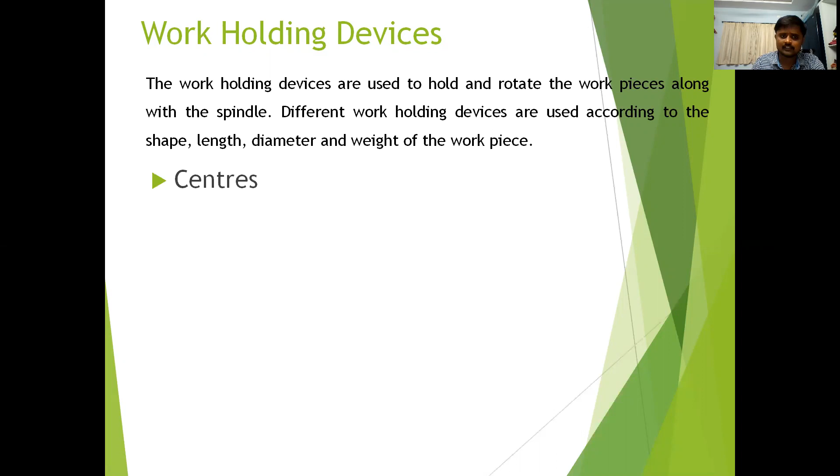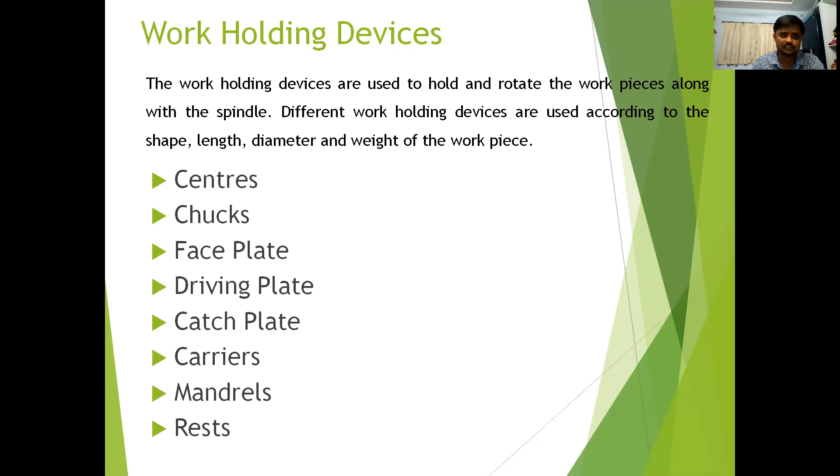We'll see some of the work holding devices: lathe centers or centers, chucks, faceplate, driving plate, catch plate, carrier, mandrels, and rests. These are some work holding devices which are generally used in the lathe machine to hold the workpieces and to rotate the workpieces.

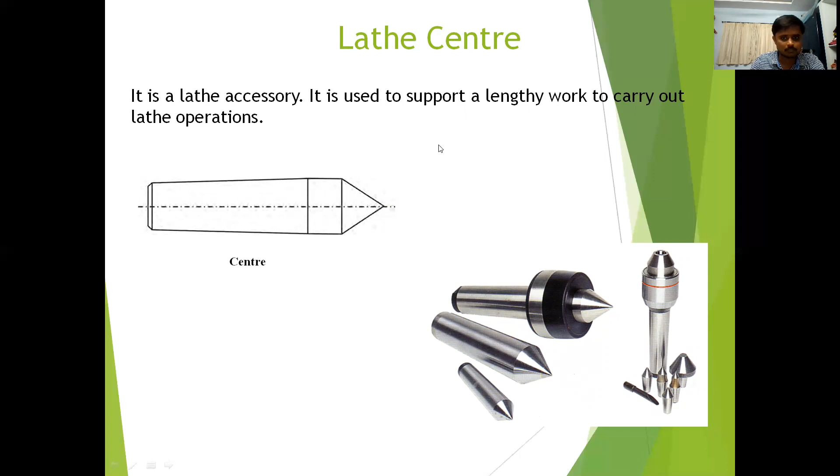First one, lathe center. It is a lathe accessory used to support a lengthy work to carry out the lathe operation. This is the lathe center, used to support the lengthy workpieces. To hold the lengthy workpiece, we hold it in between the lathe centers, and we can do the operation on the given workpiece. So like this, you can hold the lengthy workpiece in between the two centers. These are the two lathe centers.

So this is the live center, and this one is the live center, and this one is the dead center. This center is attached to the spindle, main spindle. So the motion is transferred from main spindle to the lathe center, and lathe center to the workpiece. So this is involving in the rotation, that's why it is called a live center.

There is no movement in the dead center. The dead center is inserted into the tailstock, and there is no rotary movement in the tailstock, that's why it is called a dead center. So like this, you can hold the workpiece in between the two centers - this is the live center, and this one is the dead center. So this is about the lathe centers.

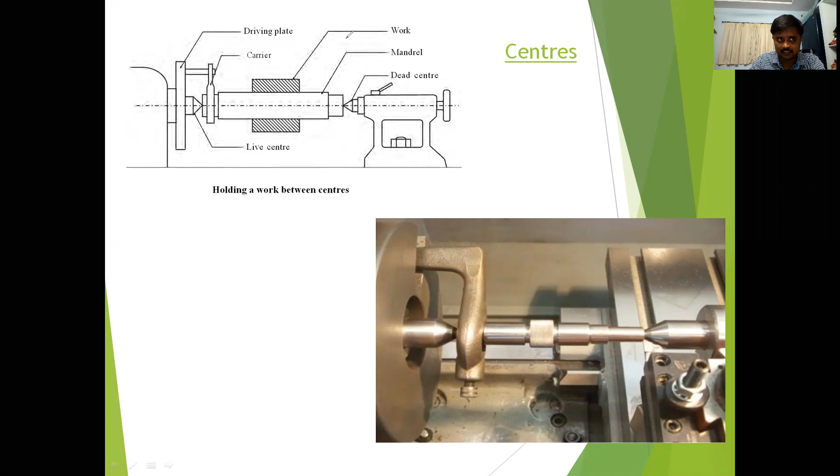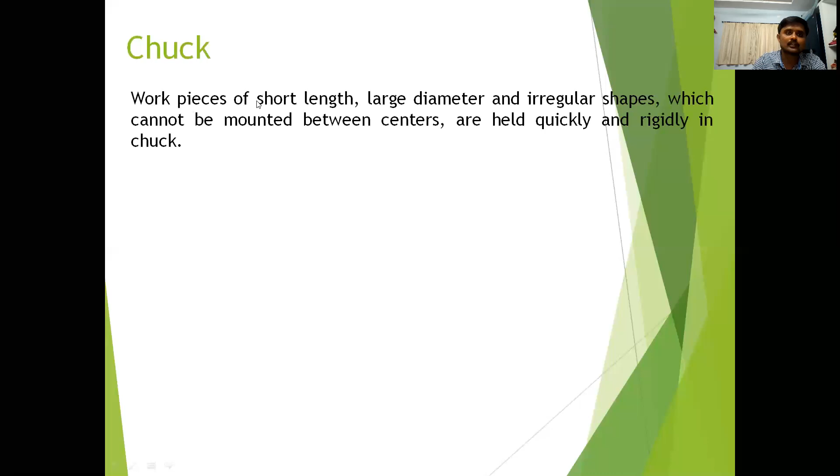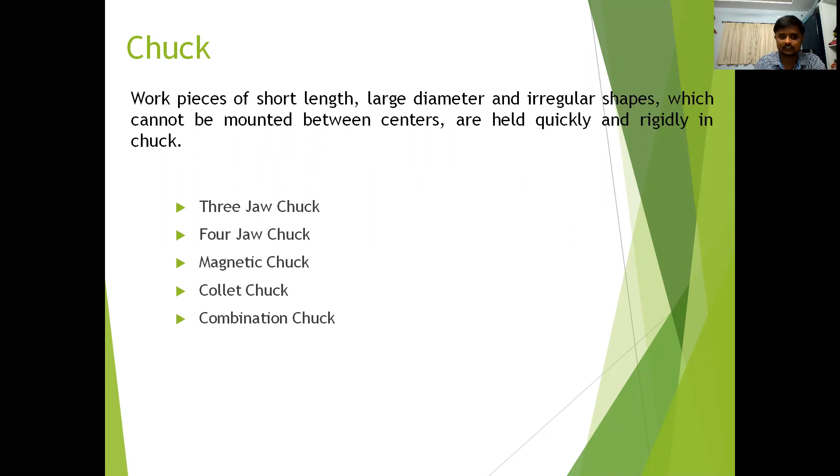In that case, we are going to replace the lathe center with the chuck. There are different types of chucks: 3-jaw chuck, 4-jaw chuck, magnetic chuck, collet chuck, and combination chuck. These are the classification of the chucks.

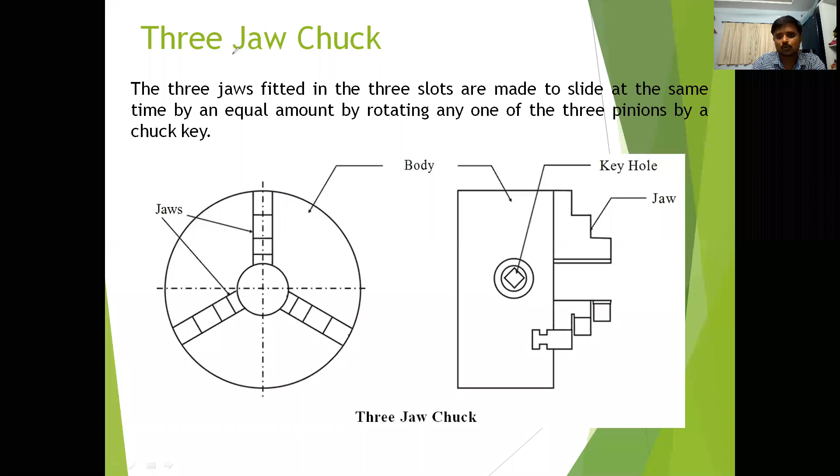That's why it is called a self-centering chuck. By operating only one key, the three jaws will be moved either towards the center or away from the center. That's why it is called a self-centering chuck. Generally, this type of chuck is used to hold cylindrical objects.

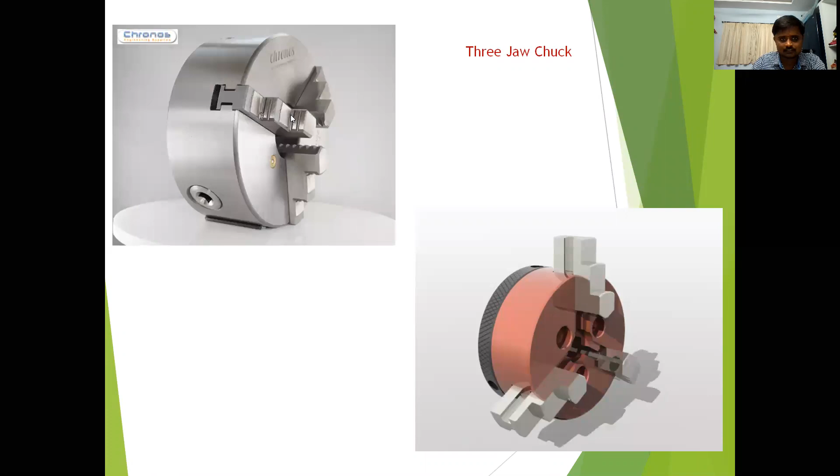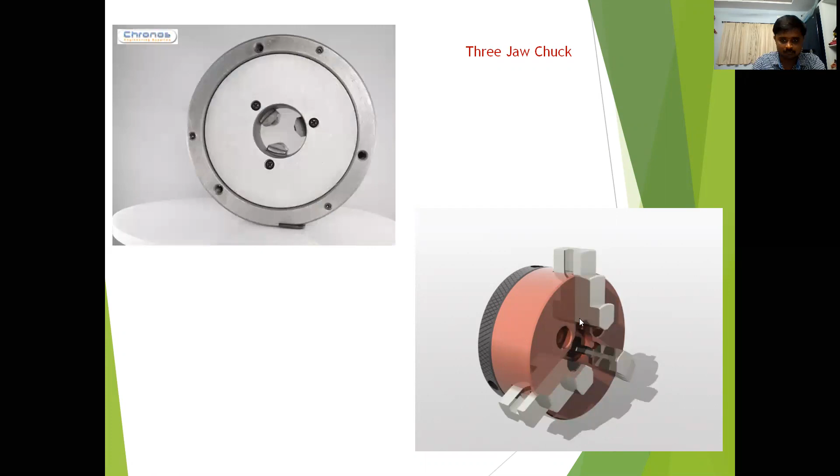This is the three jaw chuck. These are the three jaws. If you want to operate these three jaws, you can use any one of the keys to move these jaws towards the center or away from the center at a time. So this is about the three jaw chuck.

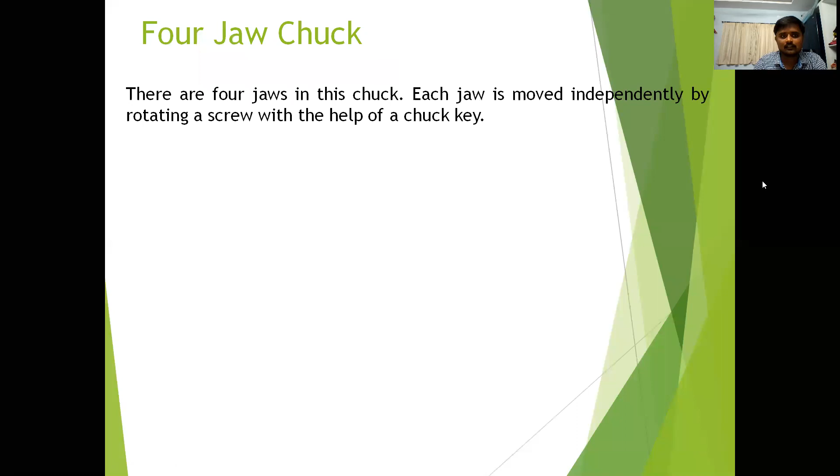Now coming to the four jaw chuck, it has four jaws, as the name indicates. Each jaw is moved independently by rotating a screw with the help of a chuck key. In case of the three jaw chuck, all the jaws move at a time, but here each jaw is moved independently. This is the first jaw, second, third, and fourth jaw. Each jaw has one key to operate it, just like the three jaw chuck.

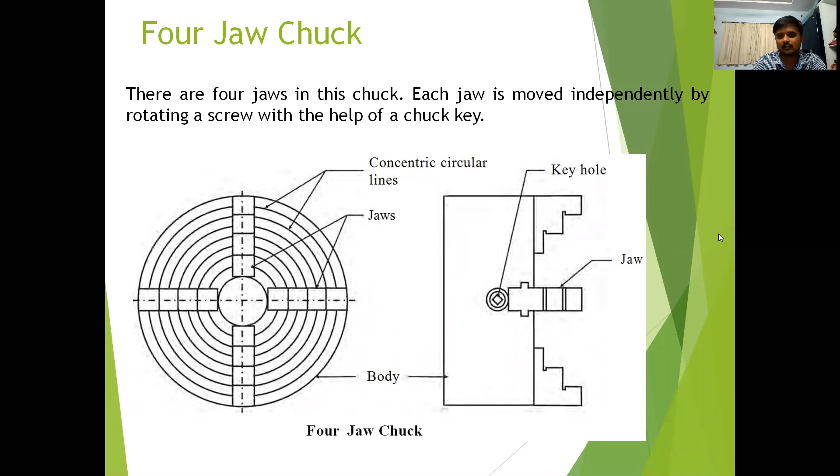If you want to move this jaw, you operate this key, either moving the jaw towards the center or away from the center. While it is moving, there is no movement in the other jaws, meaning each jaw moves independently. That's why it is called an independent chuck. This type of chuck is generally used to hold square or rectangular shapes, other than cylindrical shapes.

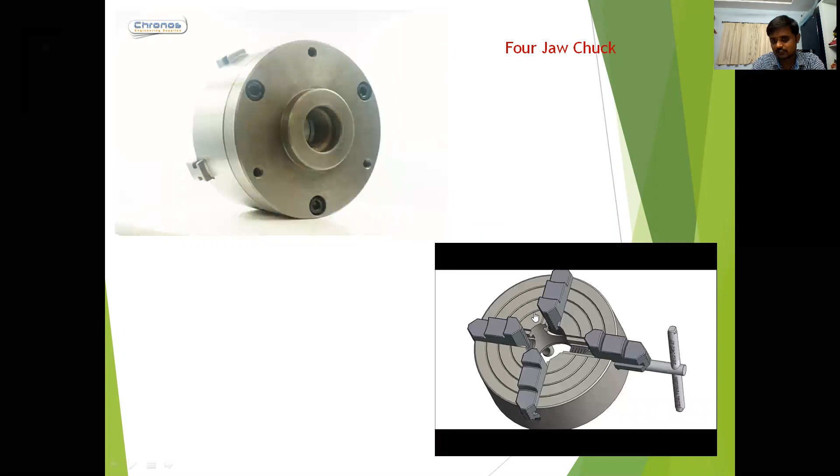These are the four jaws. If you observe, while operating this key, only this jaw is moving; the remaining three jaws stay constant, with no movement. Either you can move the jaws towards the center or away from the center by operating the respective keys. That's why it is called an independent chuck.

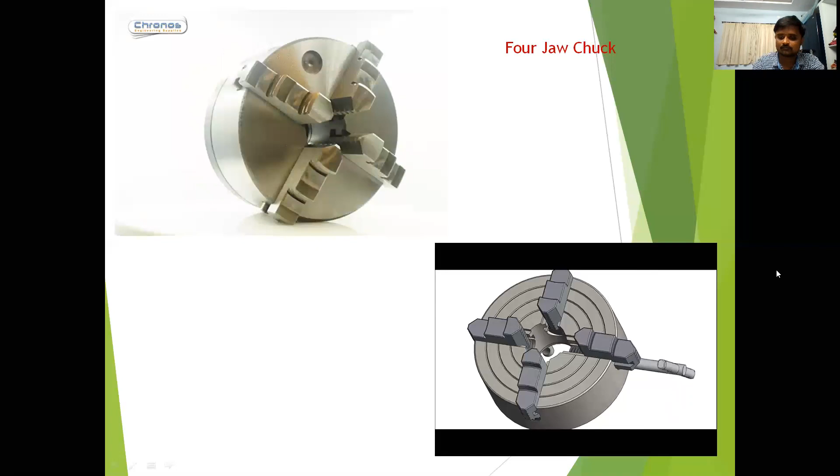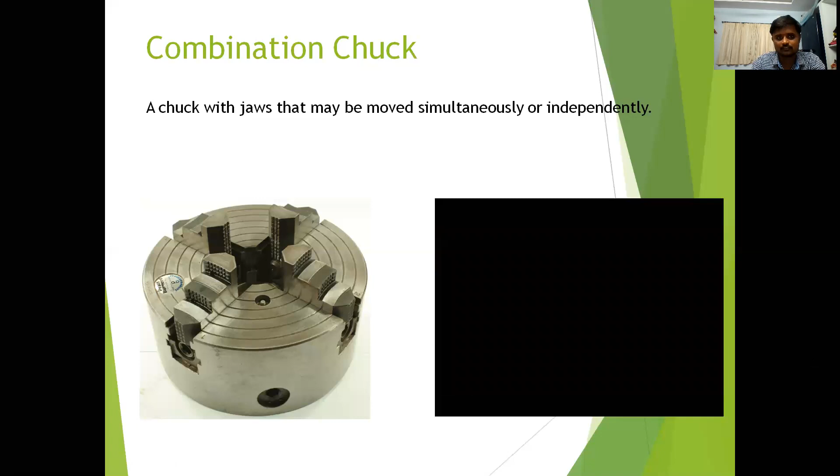It is a self-centering chuck, and on the same chuck we can also move the jaws independently, just like the four jaw chuck. If you operate this key, only this jaw moves; the remaining three jaws have no movement. So we can use this combination chuck as a self-centering chuck or as an independent chuck. That's why it is called a combination chuck.

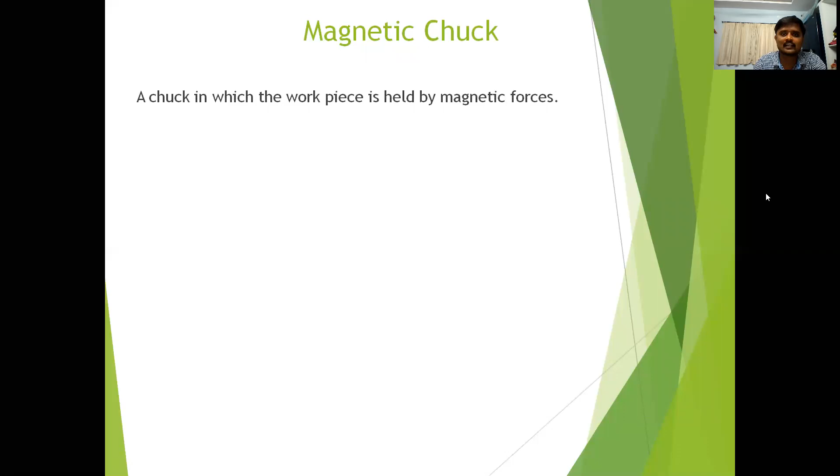Next is a magnetic chuck, named because it uses magnetic power to hold the workpieces. These are the magnets, and this is the magnetic chuck. By using this key, you can switch the magnetic power on or off.

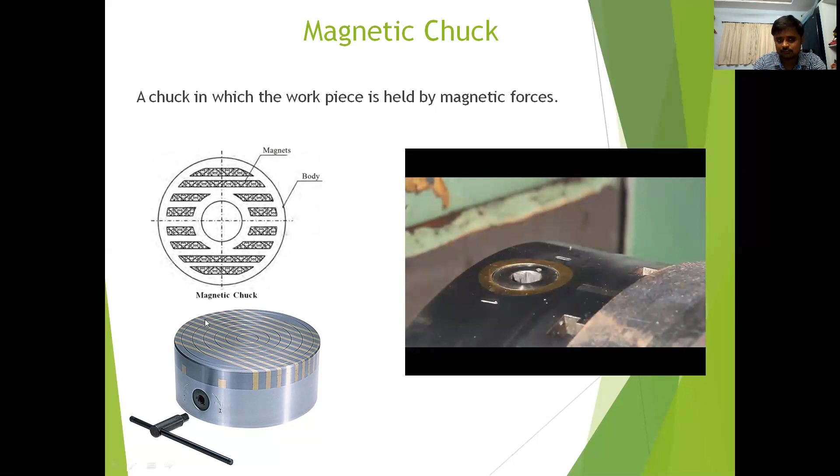Now you can see how we are going to hold the workpiece. This is the workpiece and this is the magnetic chuck. We move the tailstock for supporting purposes, and when we switch on the no-deformation clamp, we are switching on the magnetic power. Automatically, once the magnetic power is switched on, the chuck fixes the workpiece, and you can perform the operation.

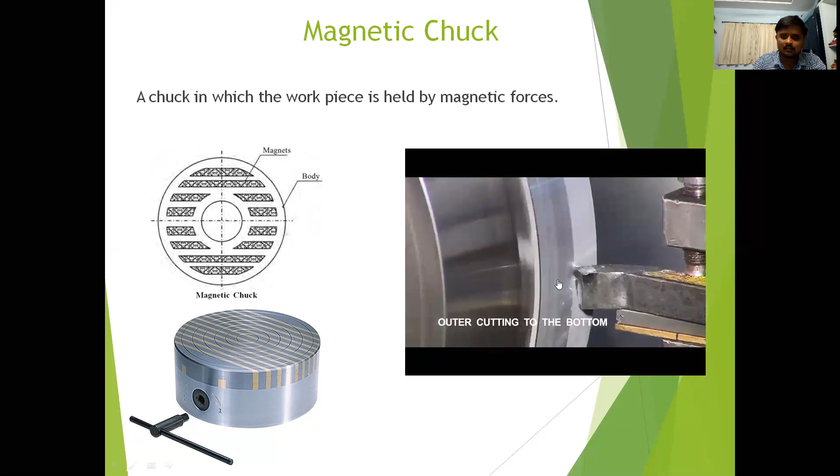However, the limitation of this magnetic chuck is that it is used only for smaller, lower weight objects. It cannot withstand higher weight objects. So this is about the magnetic chuck. Next one is a collet chuck.

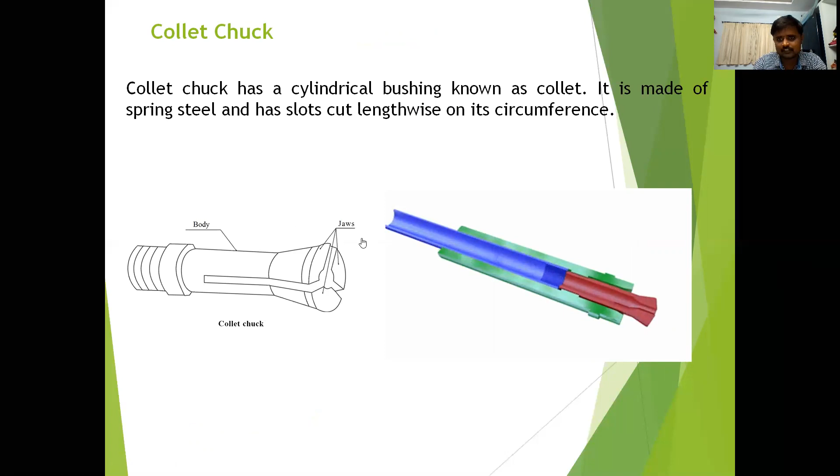Collet chuck has a cylindrical bushing known as a collet. This is the cylindrical bushing. It is made of spring steel and has slots cut lengthwise on its circumference like this.

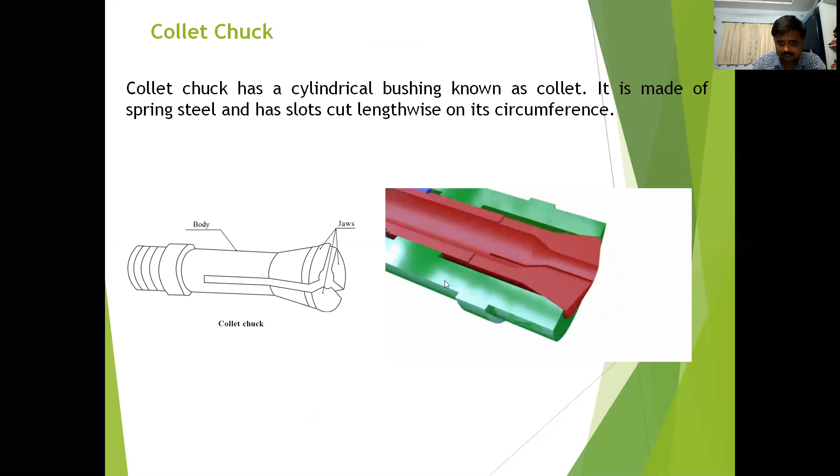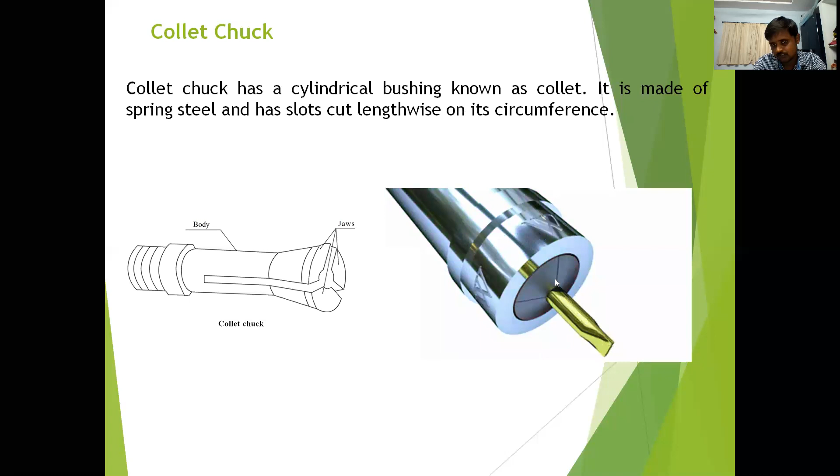Here these are the jaws. We can hold the workpiece here, so you can adjust the jaws. This is a spring type. You can observe here, you can hold the workpiece tightly and rotate the workpiece. If you pull out these bushes, automatically the workpiece will come out from these jaws.

We'll see next, this is the collet chuck, and here we are going to place the workpiece and rotate this sleeve to tighten the jaws. Now see how we are going to hold the workpiece by using the collet. This is the collet chuck.

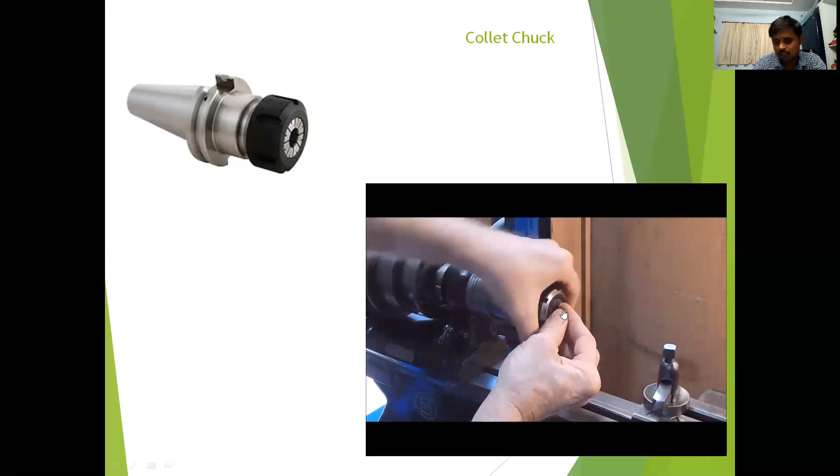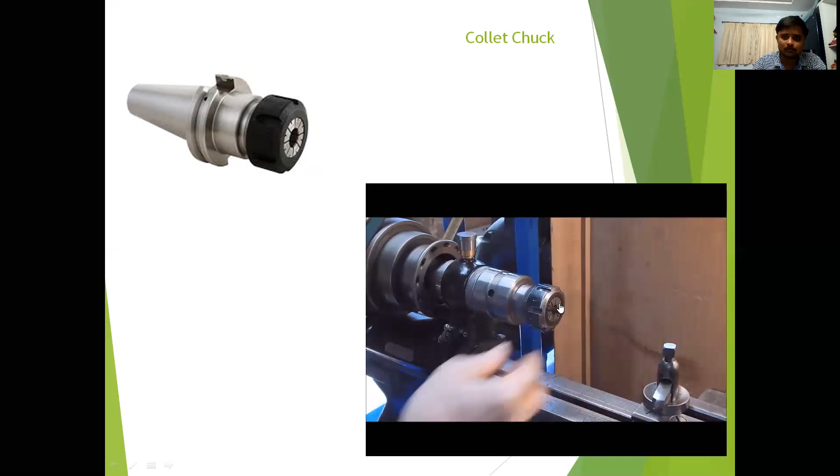This is a small workpiece, because it is not possible to hold smaller workpieces by using the jaws/chuck. So if you want to hold the workpiece very tightly in the work lathe machine, we are going to use the collet. Now you can observe this is a very small workpiece, so it is not possible to hold it using the regular jaws. In that case, we are going to use the collet jaws, which are used to hold very small workpieces.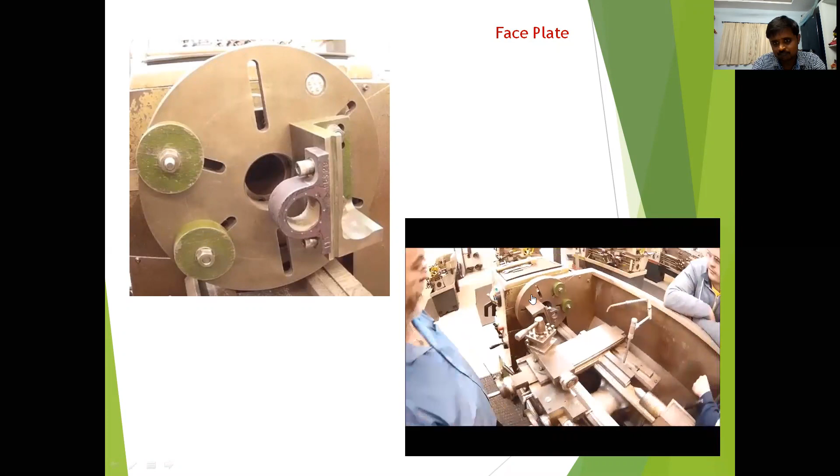Now here, if we fix this object on the faceplate using the angle plate, these are weights used for counterbalance. So this is our piece. Then you can rotate the faceplate - the faceplate is fixed to the main spindle, and you can fix the workpiece on the faceplate. Now you can perform the operation.

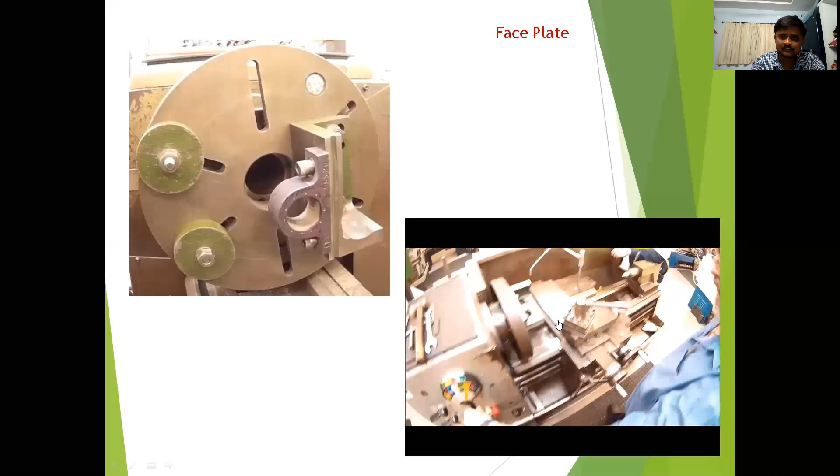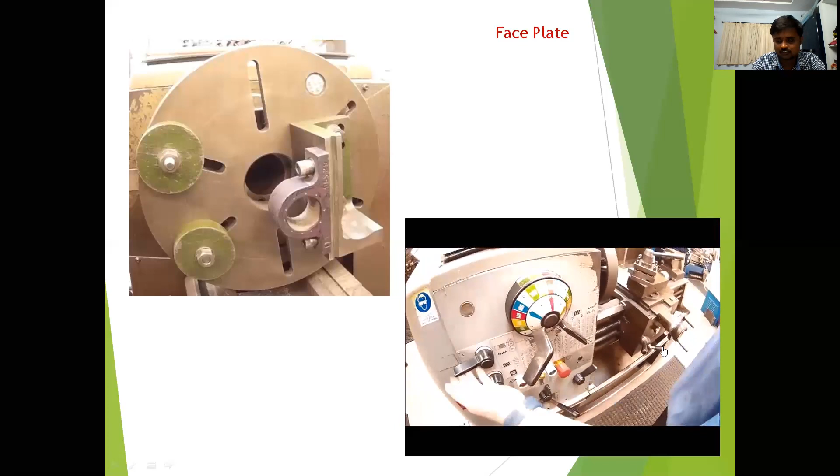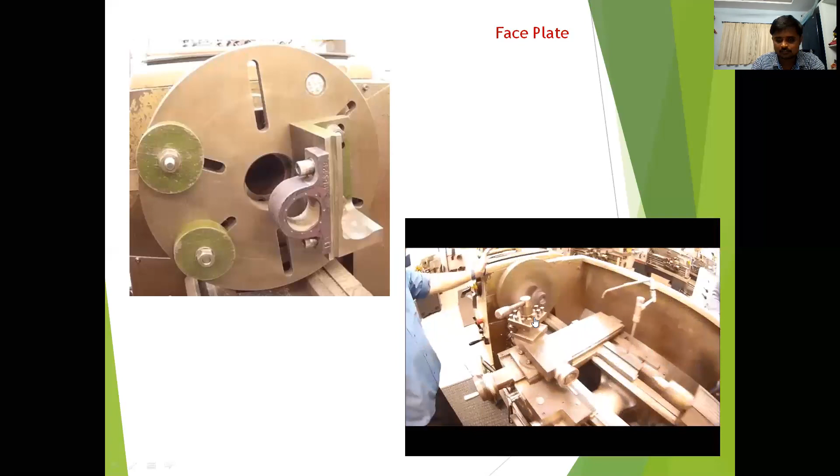So if an object has an irregular shape, it is not possible to hold it using the jaws - in that case, you can use the faceplate. By using the faceplate, you can hold any type of object. Now you can observe this video - the faceplate is rotating and the workpiece is also rotating, so we can do the operation and remove the material. So this is about the faceplate.

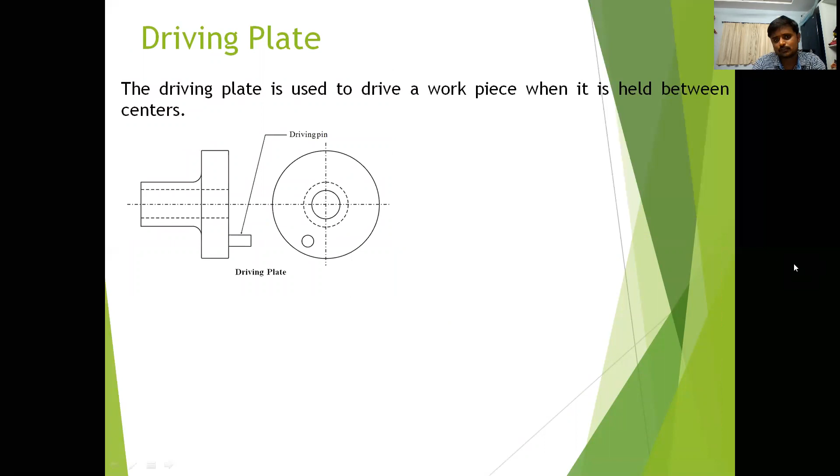Next, driving plate. The driving plate is used to drive a workpiece when it is held between the centers. So this is a driving plate. Generally, centers are used to hold long length workpieces - while holding long workpieces, motion is transferred from the headstock to the head spindle, spindle to live center, and live center to the workpiece. So when the spindle is moving, automatically the workpiece rotates. To hold the workpiece properly and perfectly without slipping, we use the driving plate, which is used along with the lathe dogs. Next we will see what is the lathe dog.

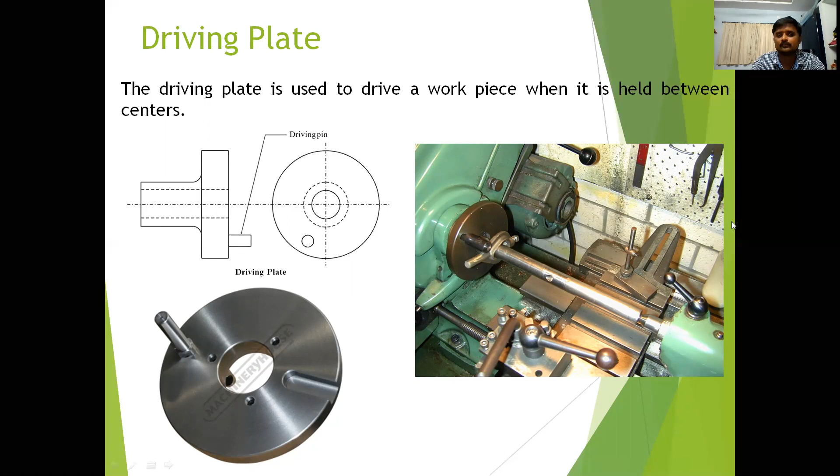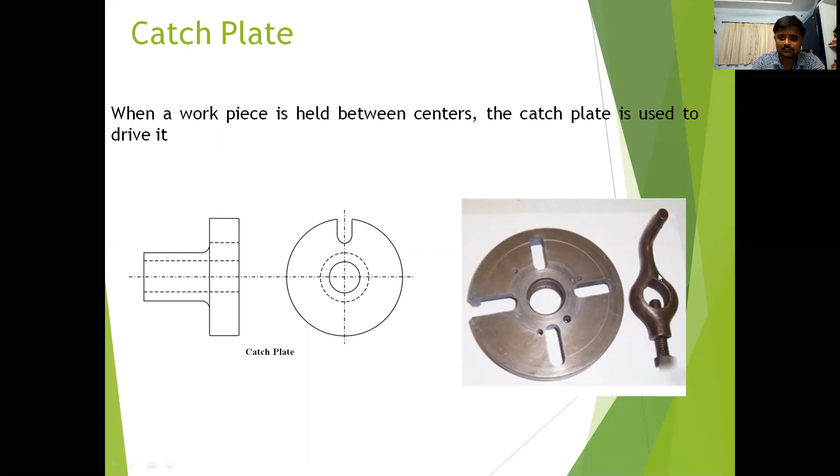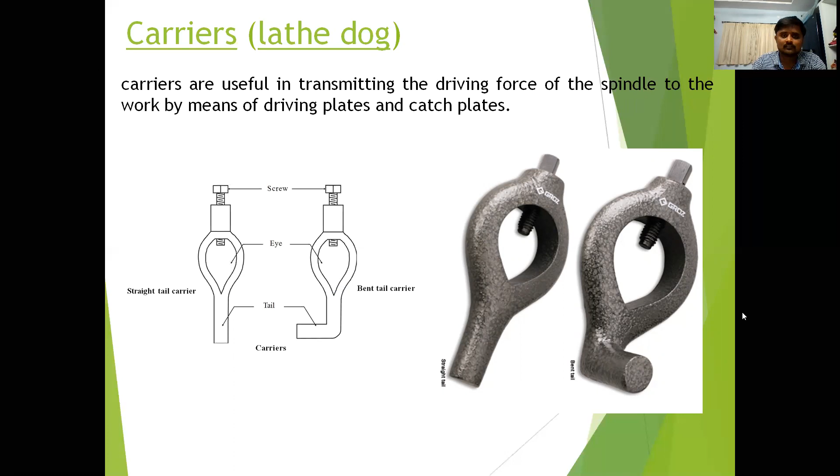The name carrier comes from how power transmission takes place in the lathe machine. Generally the power transfers from the motor to the gear shaft, from there to the headstock to the spindle, spindle to the chuck, and chuck to the workpiece.

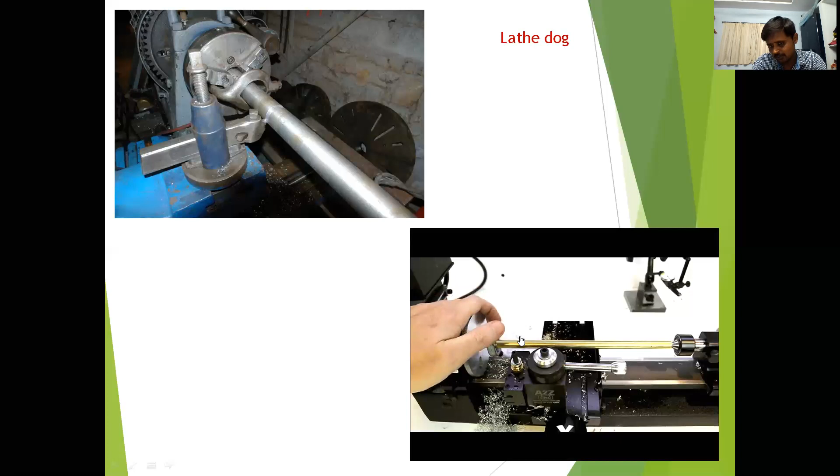When holding the workpiece between the centers, this is the driving plate. When the spindle rotates, the driving plate also rotates. If the driving plate rotates, the lathe center will rotate, and when the lathe center rotates, the workpiece is automatically rotated, since the workpiece is held between the two lathe centers.

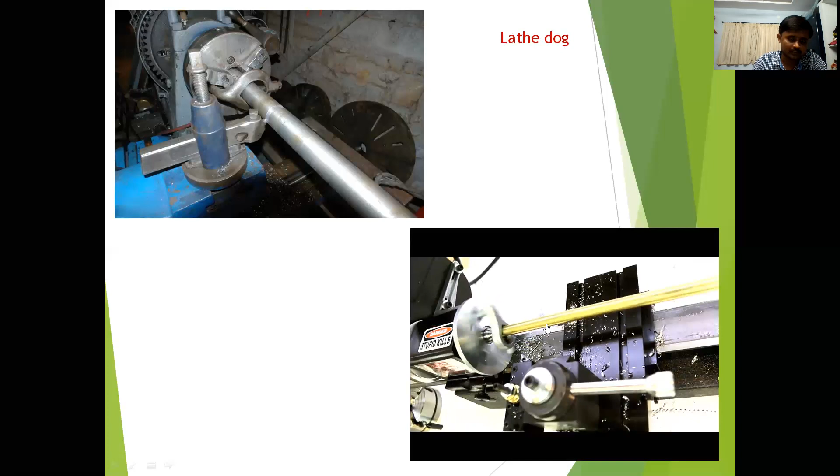To transfer the motion from the lathe center to the workpiece without losing any energy, we use the lathe dog, which is why it's called a carrier. If you are not using this carrier, and the lathe center moves at 500 rpm, the workpiece may not rotate at the same 500 rpm - it may skip. To avoid that skipping, to avoid the loss of motion from the lathe center to the workpiece, we use the lathe dog. That's why it's called a carrier - it carries the motion from the headstock, spindle, or lathe center to the workpiece.

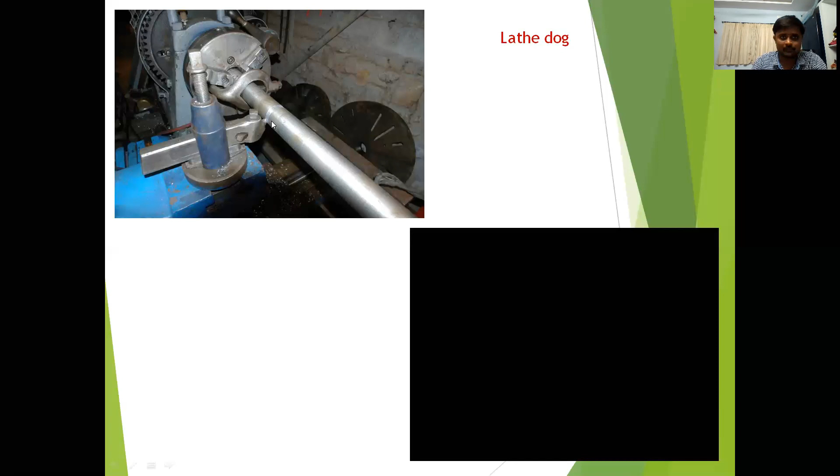Next one is the mandrels. Lathe mandrels are devices used to hold the job for machining on lathes. They are mainly used for machining outside diameters with reference to bores which have been duly finished by either reaming or boring on the lathe.

Generally chucks, lathe centers, catch plates and driving plates are used to hold solid objects. But if you want to work on the external surface of a hollow object, for example a hollow shaft, how do we hold that? Or if I take a gear and want to do some operation on its external surface, how do we hold that gear? That means we need a special device.

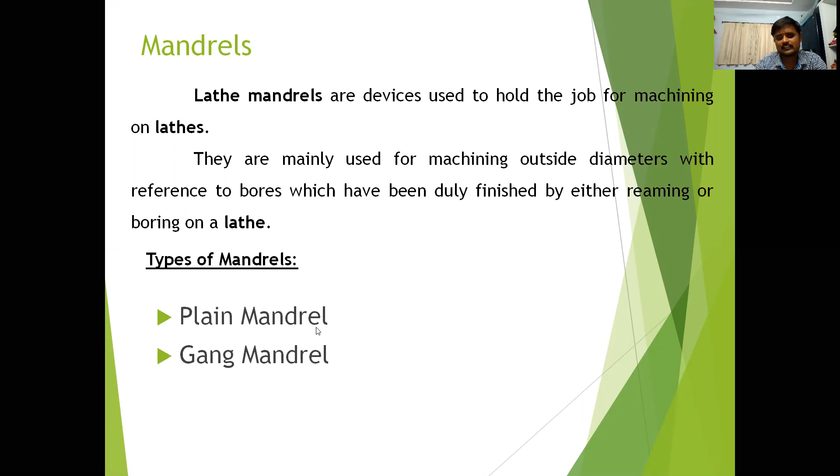Mandrels are mainly used for machining outside diameters with reference to the bores. There are different types of mandrels: plain mandrel, gang mandrel, screwed mandrel. First one, the plain mandrel. The body of the plain mandrel is slightly tapered to provide proper gripping of the workpiece.

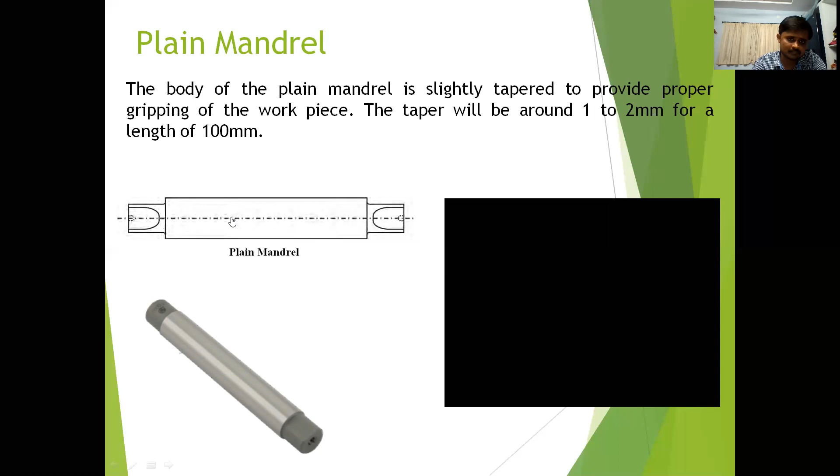It is generally tapered. On the external surface of the plain mandrel, we place our workpiece, which has some hole in it, since we want to do an operation on its external surface. This type of workpiece is not possible to hold using chucks or centers, so we place it on the plain mandrel and insert the mandrel inside the workpiece to get a tight fit.

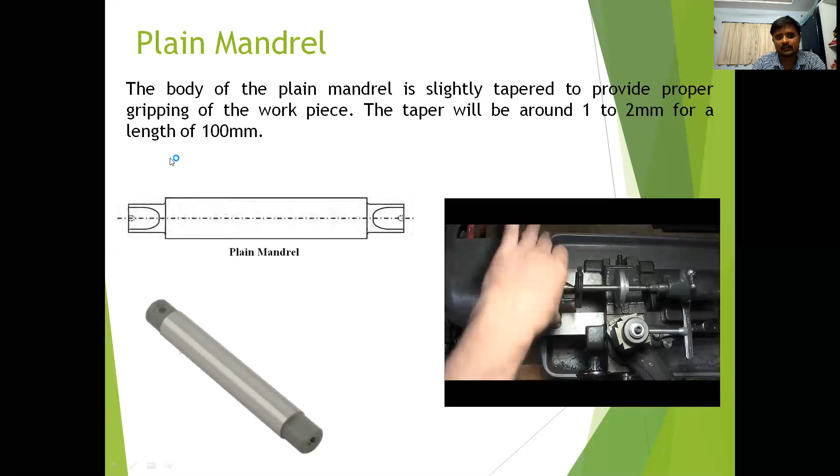Generally the plain mandrel has a taper of around 1 to 2 mm for a length of 100 mm - a tapered surface. We insert the workpiece, and because it is tapered, as it moves from one end to the other end of the plain mandrel, we get the tight fit.

This is the plain mandrel, and this is the workpiece attached to it. If the mandrel rotates, the workpiece automatically rotates. This is how you can hold workpieces that have bores or holes using the plain mandrel.

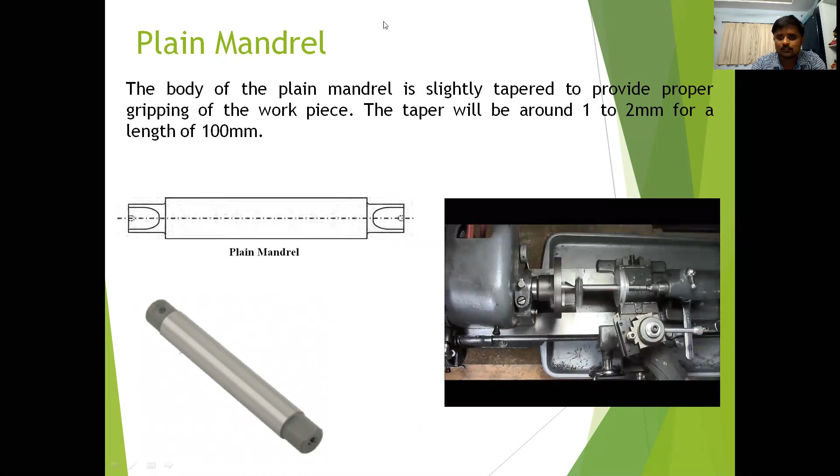Next one is the gang mandrel. It has a fixed collar at one end and a movable collar at the threaded end. Let's observe this mandrel here.

So this is the mandrel, this is the fixed collar, and this is the open end. This is a threaded open end, and this is a nut, and this is a movable collar. Gang mandrel, the name itself, it is a gang.

By using the plain mandrel, we can hold only one workpiece at a time. But here, by using this gang mandrel, we can hold three workpieces. If you observe, this is the first workpiece, this is the second one, and this one is the third one. So you can hold three workpieces at a time.

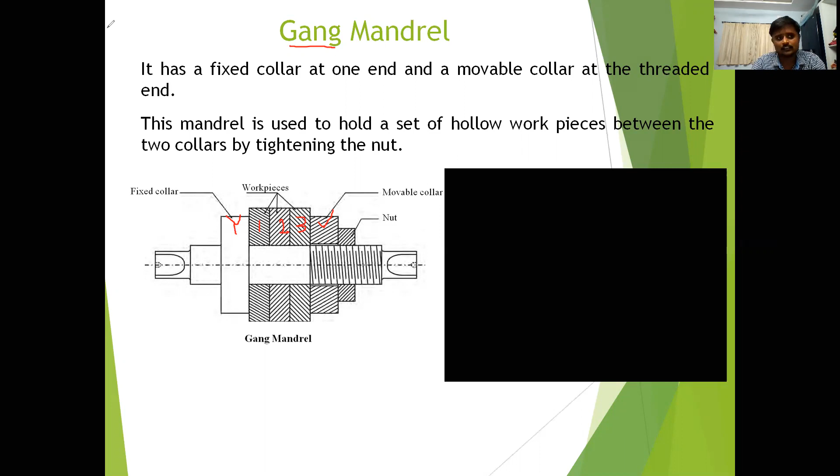To get the tight fit, we insert the three workpieces on the gang mandrel, and we insert one movable collar, and we fix these workpieces in between the fixed collar and movable collar by using the nut to get the tight fit. So like this, you can hold more than one object by using the gang mandrel.

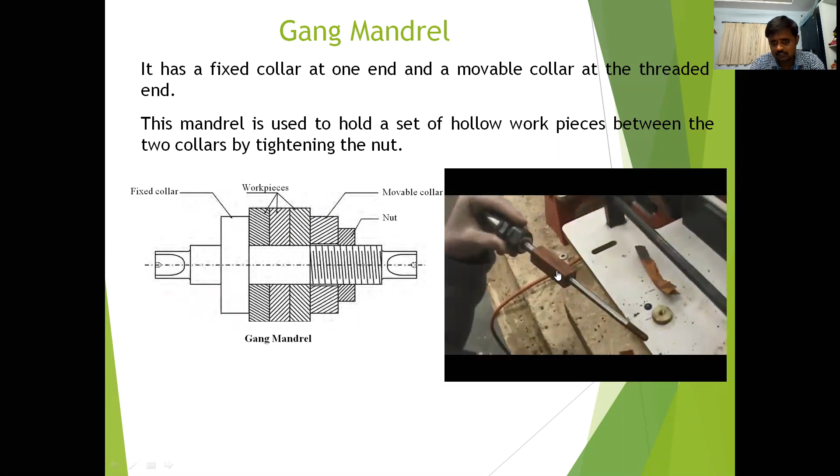Let's see here, this is a gang mandrel, and this is one workpiece, and next we are going to insert another workpiece. So here we place this object, now to make a distance between the two workpieces.

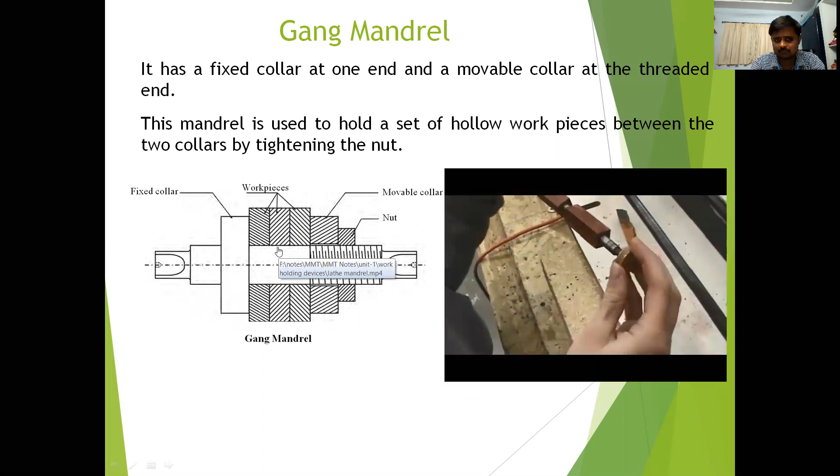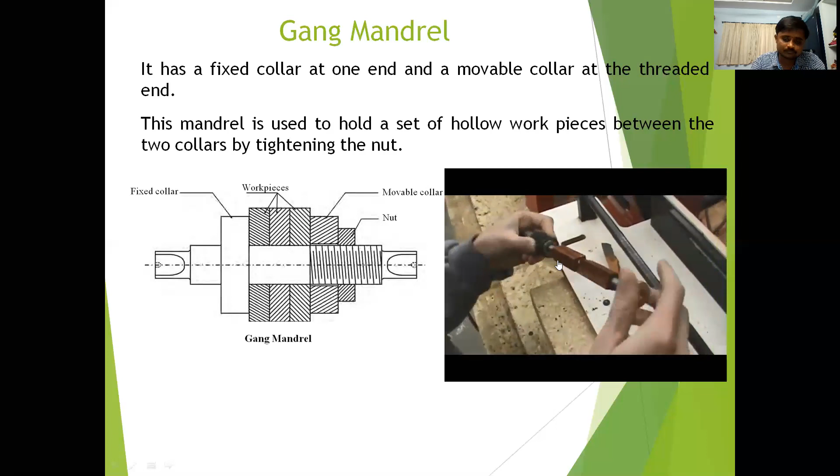Either you can fix the workpieces perfectly, or you can make some difference, you can make some gap between the two workpieces to get the tight fit. We insert a nut to get the tight fit. So like this, you can hold two or more objects by using the gang mandrels.

So next one, the screwed mandrel. Workpieces having internal threads are screwed onto it against the collar for machining.

So if any workpiece has internal threading, let's say for example we take some nut or bolt. You're going to take some bolt or nut. Let's say I'm going to take one example of a nut.

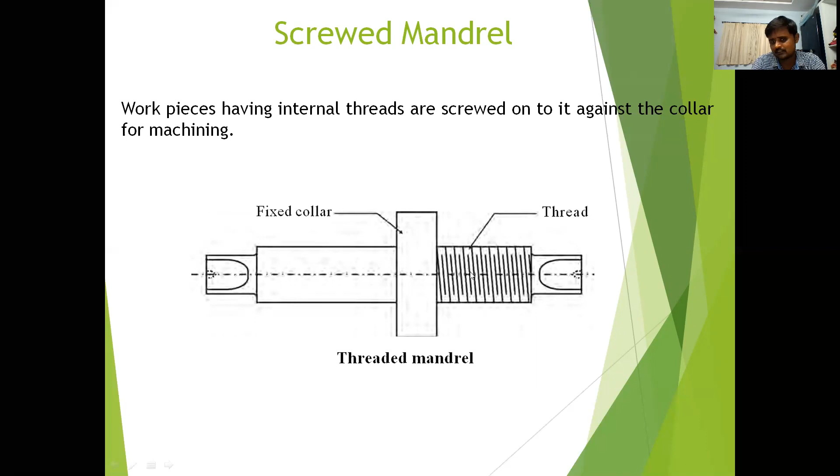If you want to do some operation on the external surface of the nut, since a nut has internal threading, first you have to hold the workpiece. To hold the workpiece, we use the threaded mandrel, which already has some threads, and on this we place the nut.

Coming to rests, a rest is a mechanical device to support a long slender workpiece when it is turned between centers or by a chuck. These are used to support the workpieces.

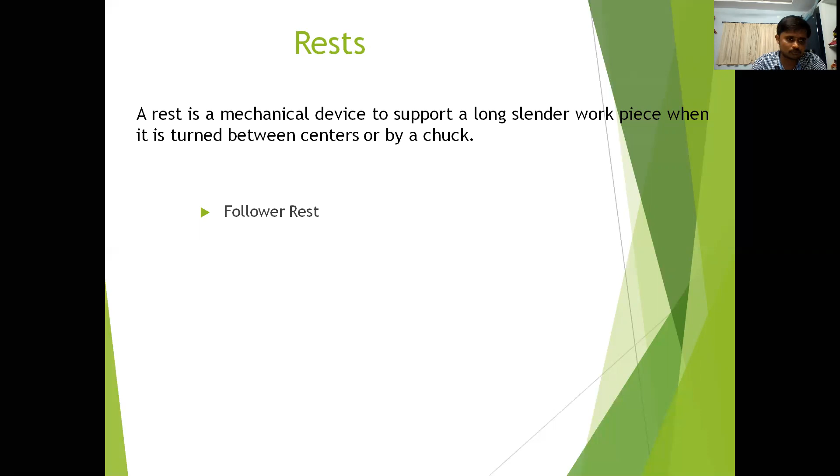There are two types of rest: follower rest and steady rest. The steady rest may be made to slide on the lathe bedways and clamped at any desired position where the workpiece needs support.

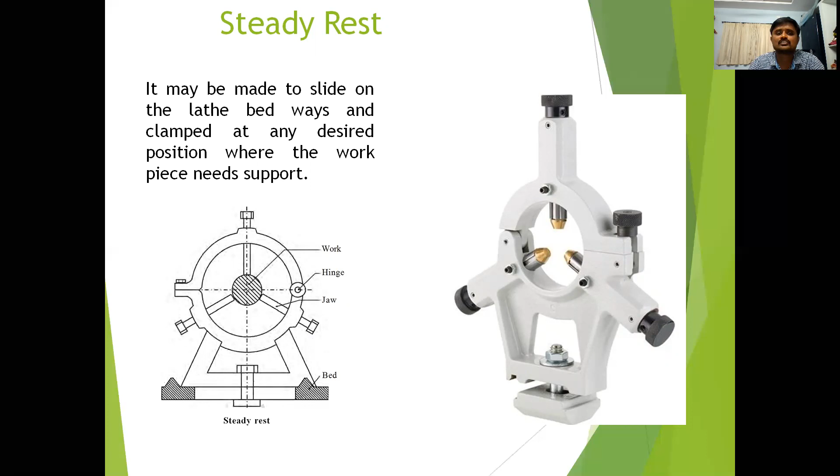So while it is moving automatically at this end, we may observe some vibrations of the workpiece. To avoid those vibrations and to get support to hold the workpiece at the other end, we place the rest. So here we can fix this rest.

Let's see here where the object is fixed in between the rest. So the steady rest means the rest is fixed at a given position. It will not move. You can adjust it anywhere, but once you fix the rest, you can't move the position of the rest.

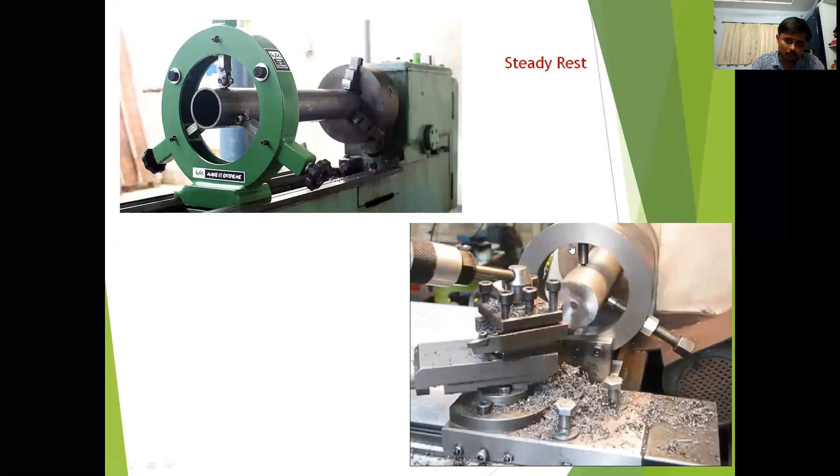So we can hold the workpiece, that's why it is called a supporting purpose, or a supporting device. So like this, you can support the workpiece by using the rest. We can do the operation. So this is for the supporting purpose.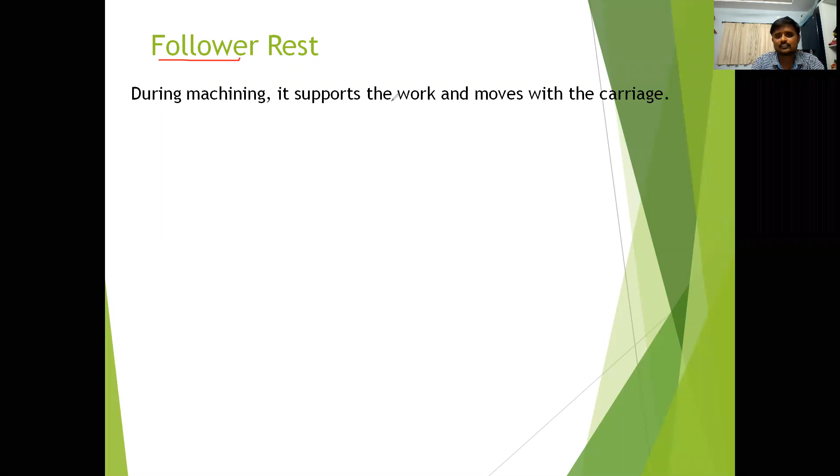Next, the follower rest. The name itself indicates that it follows. During machining, it supports the workpiece and moves with the carriage.

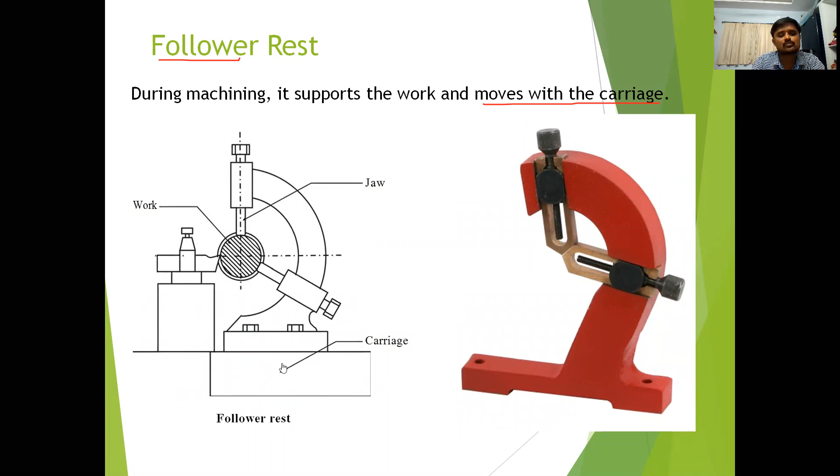Along with this cutting tool, the follower rest also moves, that's why it is called a follower rest. It follows the cutting tool. See this one, this is the workpiece, a long length workpiece, and this is the cutting tool. So this is a follower rest.

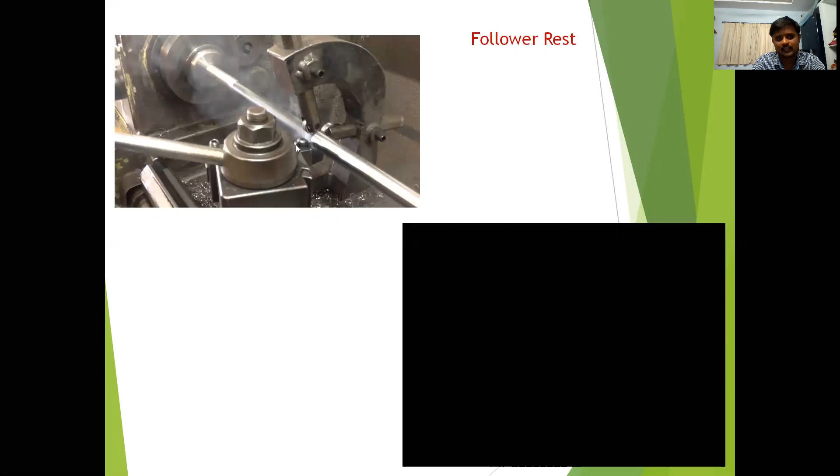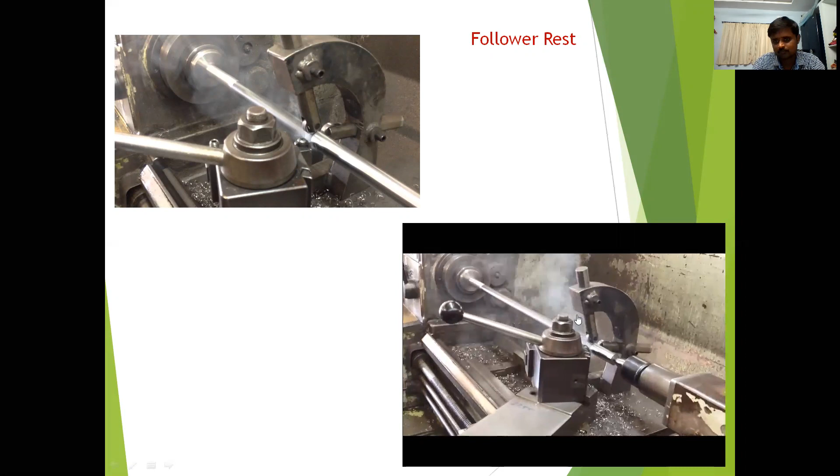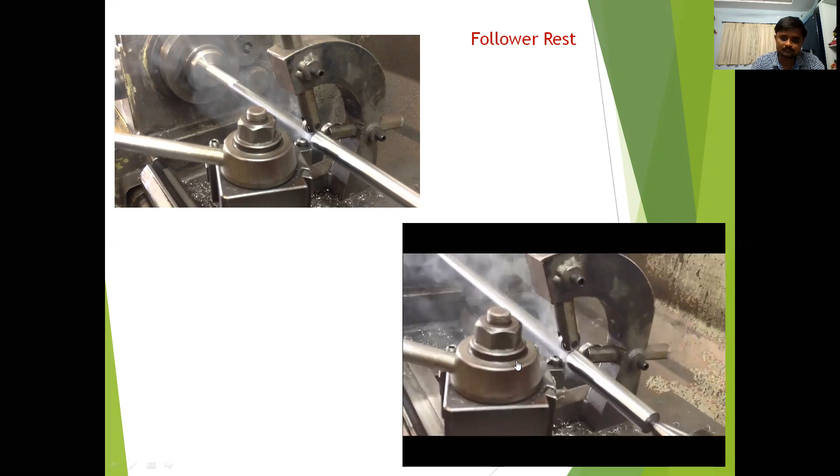If you observe, we are moving the cutting tool, and along with the cutting tool, the follower rest also moves. It is placed on the carriage and moves along the cutting tool, following the workpiece or cutting tool. So this is about the follower rest, and this is about the work holding devices.